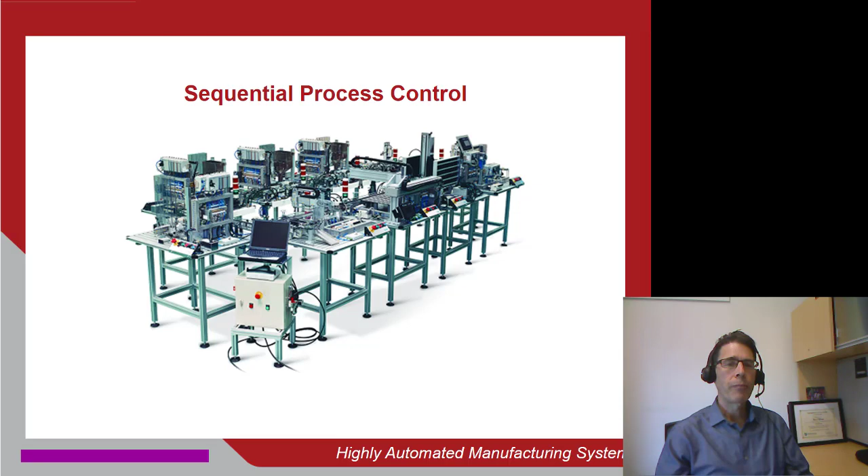In this one we're going to be looking at doing a sequential process control similar to the type of processes on the HAS200 where you've got multiple actuators and one actuator moves and then triggers another actuator to move, and then after that maybe there's a time delay and another actuator moves. So we're going to look at how to approach that in the program and what you're going to have to do in Virtual Lab 05 to modify your circuit for multiple actuators.

So first of all, you're going to build up a circuit that looks like this, and it's going to include a PLC and the electrical connections to the PLC. And the objective of the program is that you're going to hit a start push button, which will trigger actuator A to extend. When that one extends, its sensor A1, the extend sensor, is going to trigger B to extend, and then B's extend sensor will trigger C to extend.

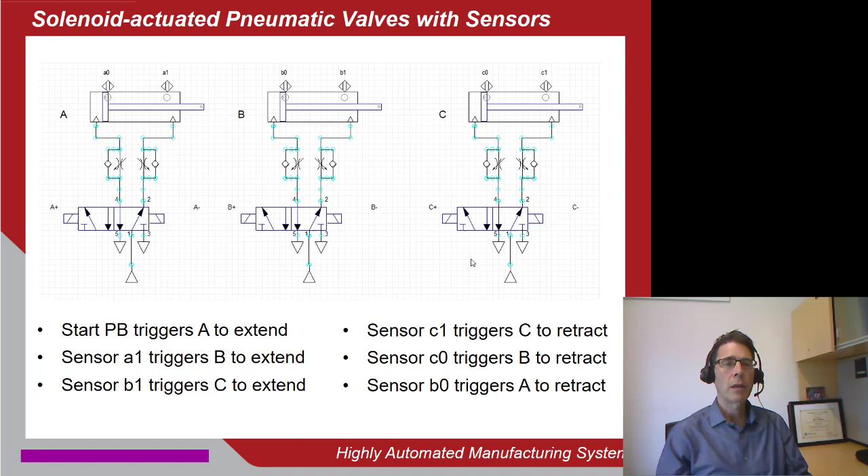Then once C is finished extending, it hits sensor C1, that will trigger C to retract, and then when it hits C0 will trigger B to retract, and B0 will trigger A to retract. So that's the basic sequence we're going to be executing.

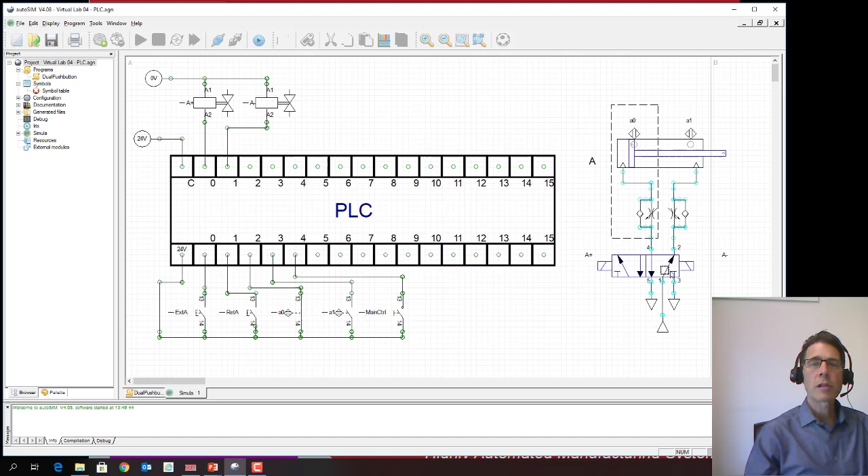What I'm going to do is open up the AutoSIM from your previous lab, which was the PLC control lab from Virtual Lab 04, and we're just going to make some modifications here to create the 3 actuators and start working on the program. So the first thing you want to do is we're going to take the actuator over here. I'm just going to delete the words here. I don't think we need those. So I'm just going to select this and drag it down here to the bottom of the PLC.

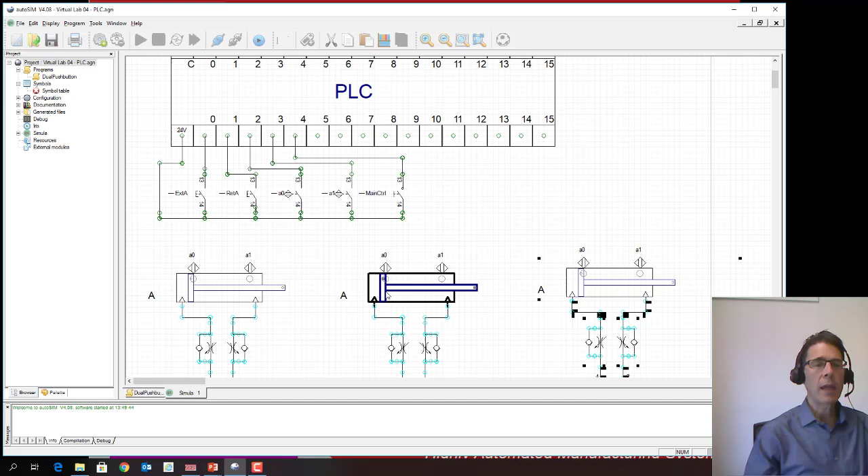We want to set it up so we'll be able to see the PLC and the actuators at the same time. Then I'm going to make a copy of this whole thing. Paste it right next to it. And then another copy. Okay, and so we want to make actuators A, B, and C. So now I'm just going to go in and change the letter designations and the sensor labels so we have actuators B and C. So remember, this is just a text label. It doesn't have any functional properties. The actuator itself, we have to change this to B plus, and this one to B minus.

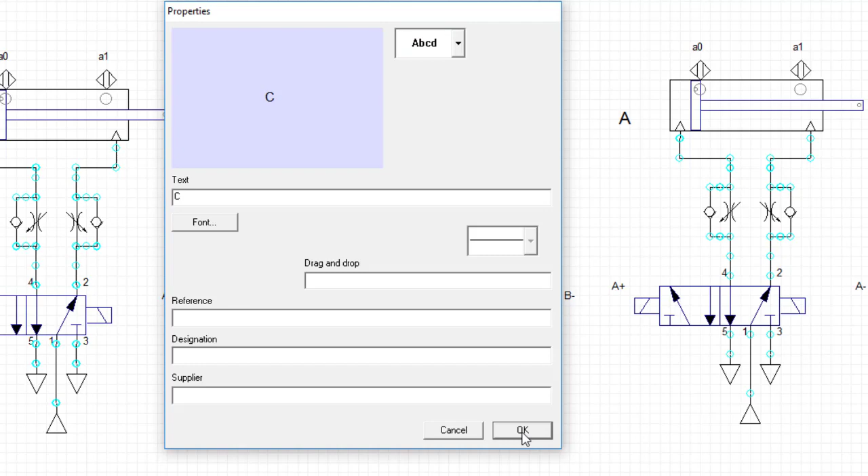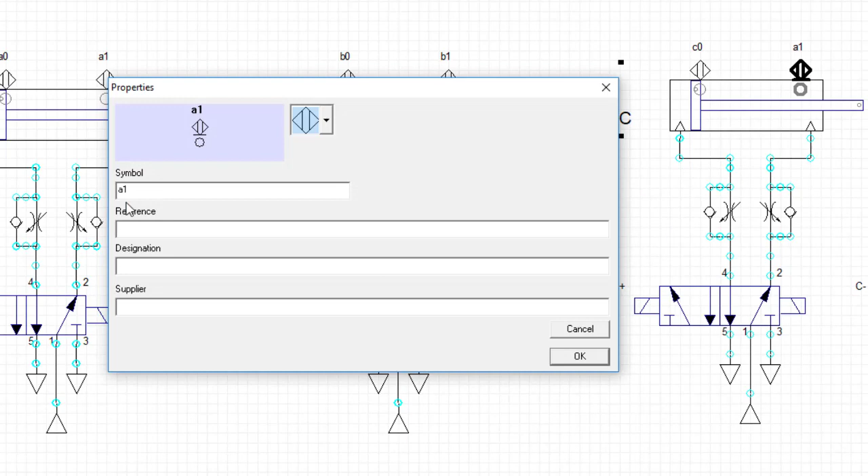And the sensors, B0 and B1. And we'll do the same thing for this one, which is going to be actuator C. Change the text, change the valve actuator symbols, C plus and C minus, and then the sensors, C0 and C1.

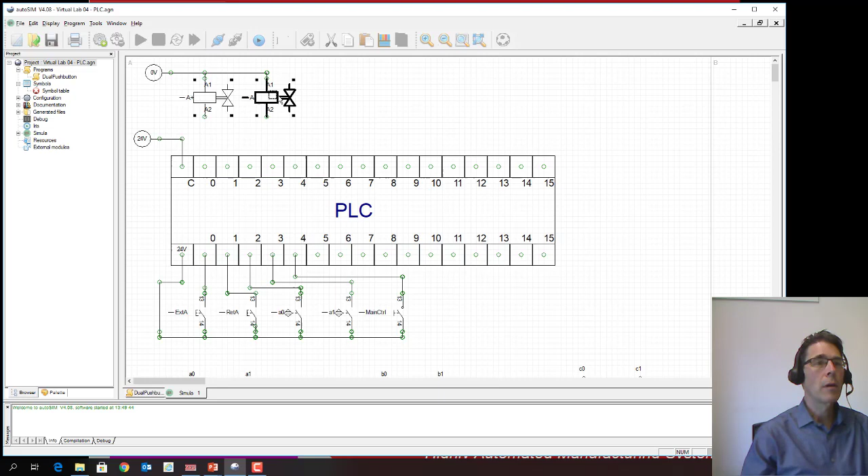So now I need to add the electrical symbols for those new actuators, and first thing I'm going to do is move these up a little bit, make as much room as I can, and I'm just going to delete these connections for now. And I'll make copies of these two. So we now have 3 pairs of actuators because each cylinder has a valve that has 2 solenoids to actuate it. And let's hook these up now.

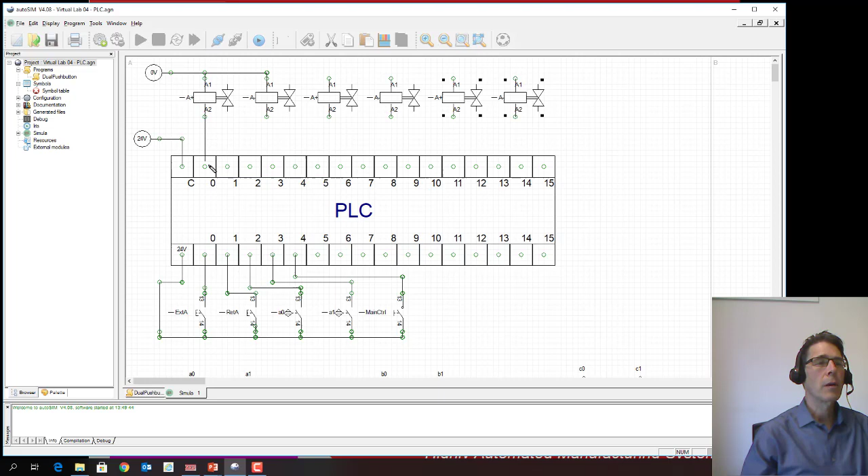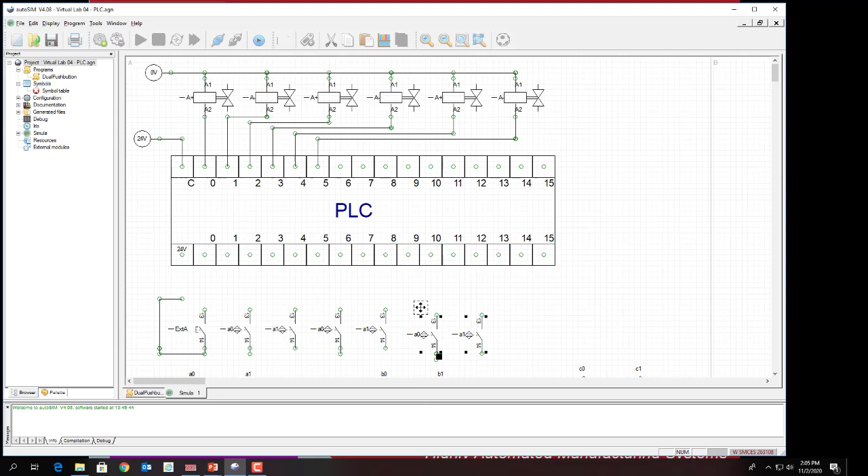Okay, and we have to do the same thing with the sensors. I'm going to get rid of this main control. We're not going to need that anymore. And we're only going to use one push button. So I'm going to delete these connections. And move these down. Okay, and I'm just going to copy the sensors A0 and A1 twice. And we'll hook those up.

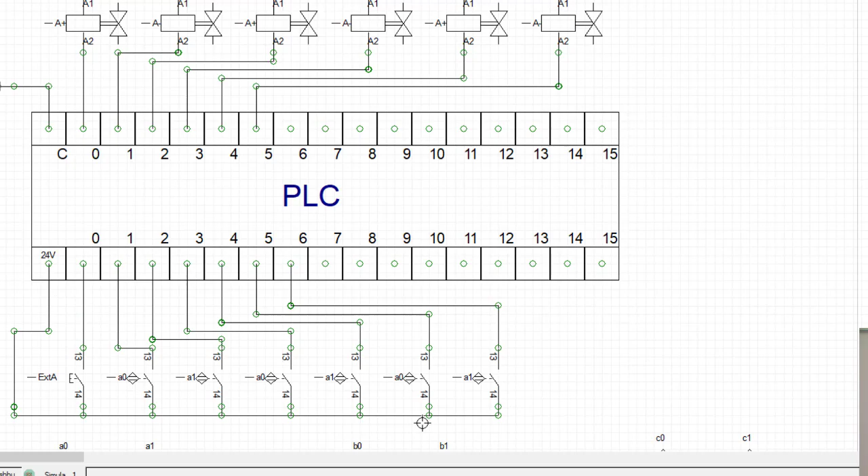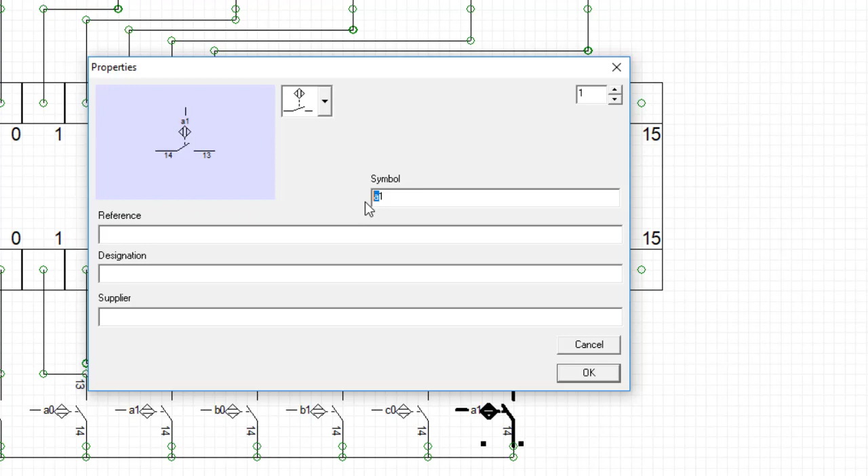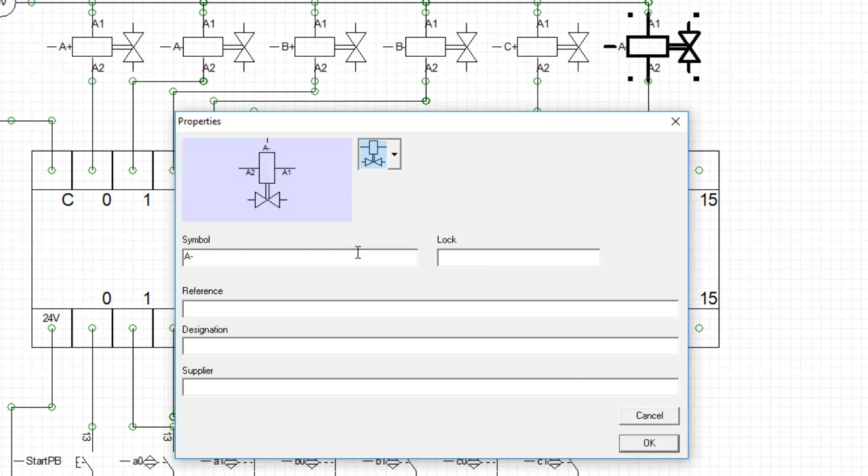Okay, now we need to relabel the sensors. This is B0, B1, C0, and C1. And then I have to change the labels on the solenoid, the electrical symbols for the solenoid. So I've got A plus and A minus. I'm going to make this B plus, and this will be B minus, and C plus, and C minus.

So I'm going to take the symbol table that I had and just delete it, because I'm going to use some new names. So if I right click, create a symbol table. Now before I do that, let's take a look at the outputs. The outputs are starting at 0 and going to 5. And so let's do those first. So to create a symbol, I right click, click add.

Now I had mentioned last time that AutoSIM doesn't allow plus and minus symbols in the syntax for the valve labels. And last time I spelled it out A plus, A minus. What I think I'll do this time is actually call it AEXT, which is closer to the function, A extend. And that's on output 0. And then the next one would be A retract, ARETR. That's on output 1. And then we have BEXT on output 2. And we have BRETR for retract on output 3.

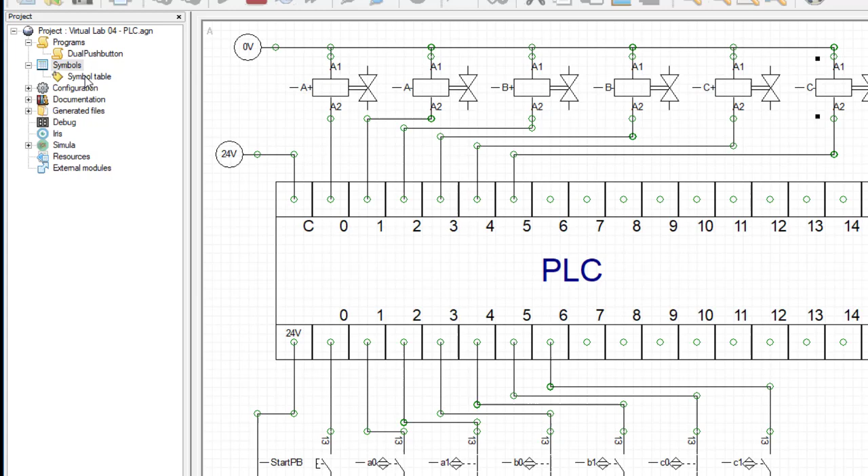And CEXT on output 4. And then CRETR for retract on output 5. Okay, then the inputs, starting at input 0, we've got the start push button, and then we've got sensors A0, A1, B0, B1, and C0, C1. So we're going to add, we'll just call it start, and that's at input 0.

Now for the syntax for the sensors, I found out that C0 and C1 is used as a designation for a counter, and so you can't use it as a name for an input variable. So I'm just going to add SENS to stand for sensor. So A sense 0 is A0. I think I'll copy that so I don't have to keep typing it. And that's at input 1. A sense 1 is at input 2.

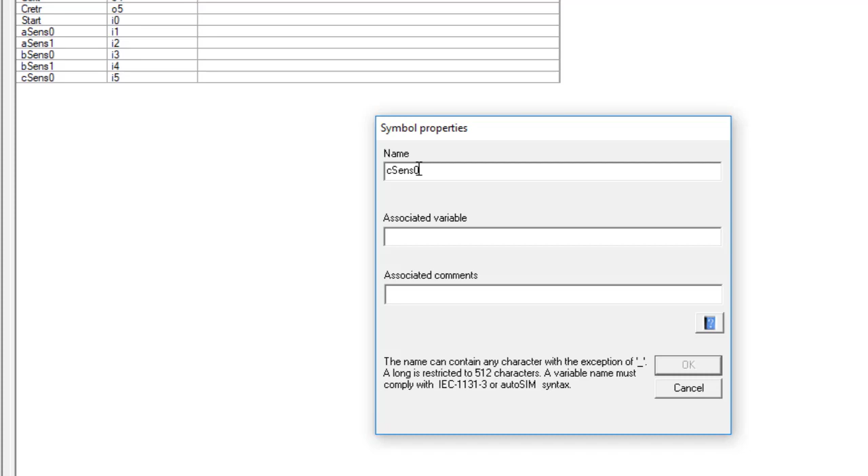B sense 0, input 3. B sense 1, input 4. C sense 0 is at input 5. And C sense 1 is on input 6.